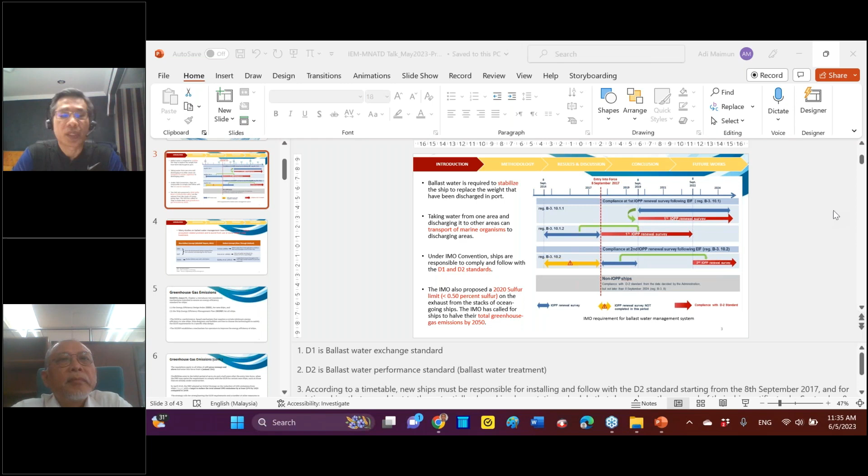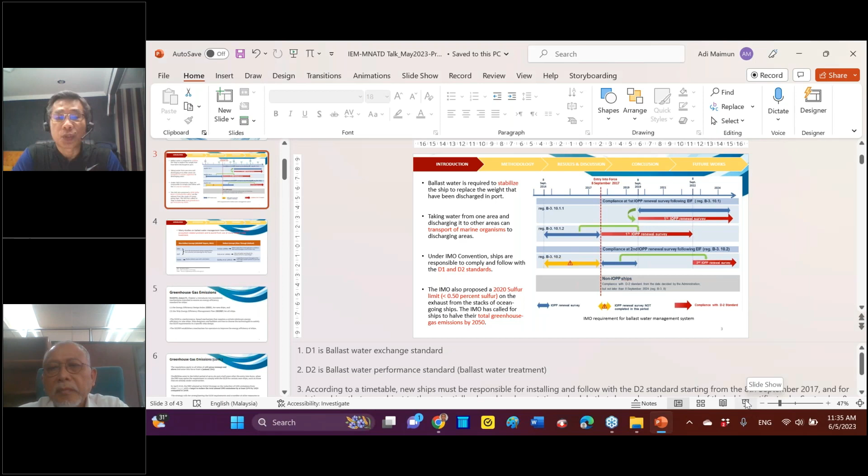Today we have another session of technical talk organized by MNATD, and Alhamdulillah, this morning we managed to bring a special speaker, one of the OTAI in UTM, which is Professor Dr. Adi Maimun. He will be delivering a very specific subject. The title is Reducing Hull Resistance Using Air Injection for LNG Vessel with Free Ballast System.

I think this is a very interesting subject, by the fact that LNG vessel is heavily utilized in the marine industry as well as the oil and gas industry.

A very quick background on our speaker, Professor Adi Maimun. As I mentioned previously, one of the OTAI that we regard, especially within the marine industry. At present, Professor Dr. Adi Maimun is currently serving as a professor in naval architecture in the Faculty of Mechanical Engineering, UTM Skudai.

His specialization is mainly in the field of marine vehicle and structural dynamics using CFD, FEA, AIS, adopting time domain simulation, and he also performs experimental work. He has published, I would say, more than 100 international papers related to his area.

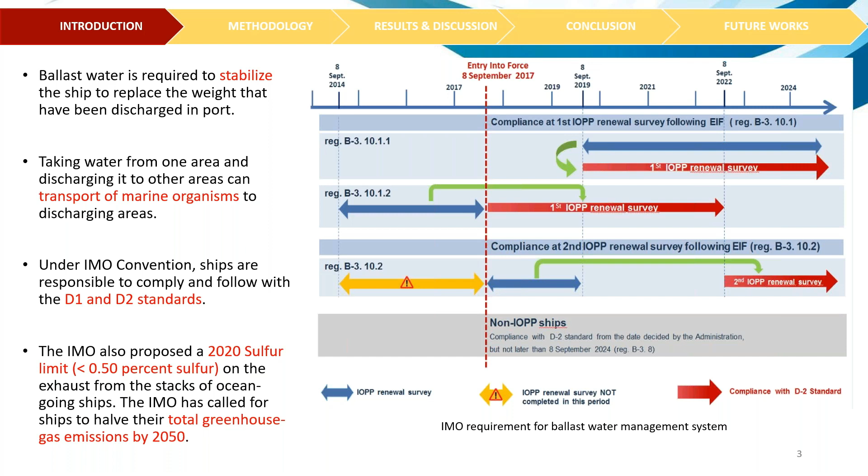So also, the IMO proposed reduction in sulfur and reduction in emission, for reducing this greenhouse effect due to the emission. So by 2050, we have to come up with a big reduction in gas emission, of which Malaysia has ratified this IMO regulation. So we have to comply with this by 2050.

And with this free ballast, we don't carry any water. Actually, the water just passes through the ballast tank. So it acts like you're ballasting it, but we don't retain water inside the ballast tank.

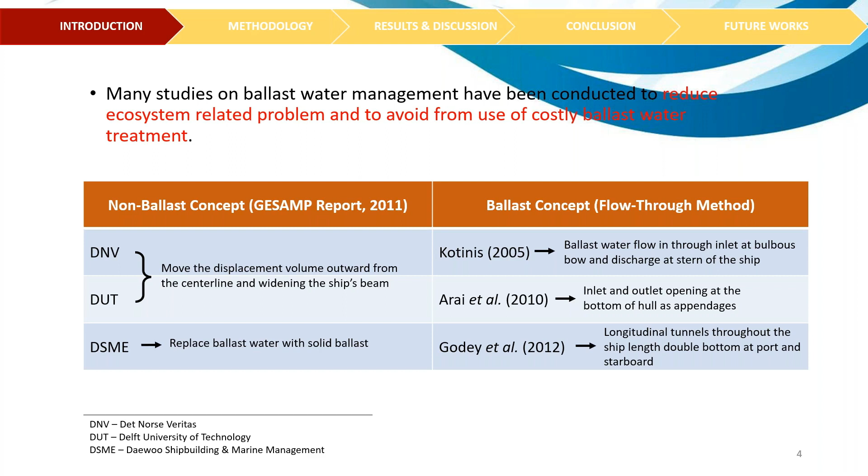So EEDI is basically at the design stage, and SEEMP is more when you're operating the vessel to come up with improved efficiency, so that the target is just to reduce the emission.

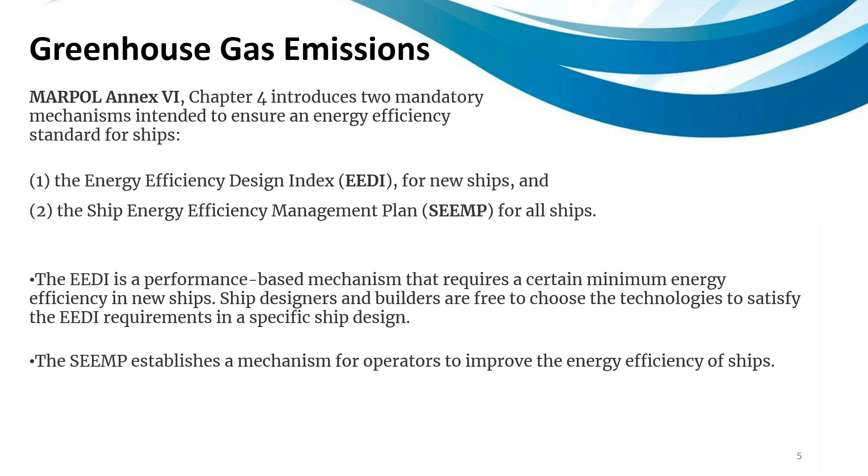The regulation applies to all ships of 400 gross tonnage, so medium and large vessels, starting January 2013. What is required is that the target is to reduce total annual GHG emissions by at least 50% by 2050 compared to 2008. So it's a big job, especially for old vessels, and even new vessels.

You need to use technology, and I don't know whether it's good or bad. Malaysia has ratified this, so Malaysia has to comply with this now.

So it involves measures like reducing methane, CH4, VOC emission, anything to do with low carbon, zero carbon fuel, and so on.

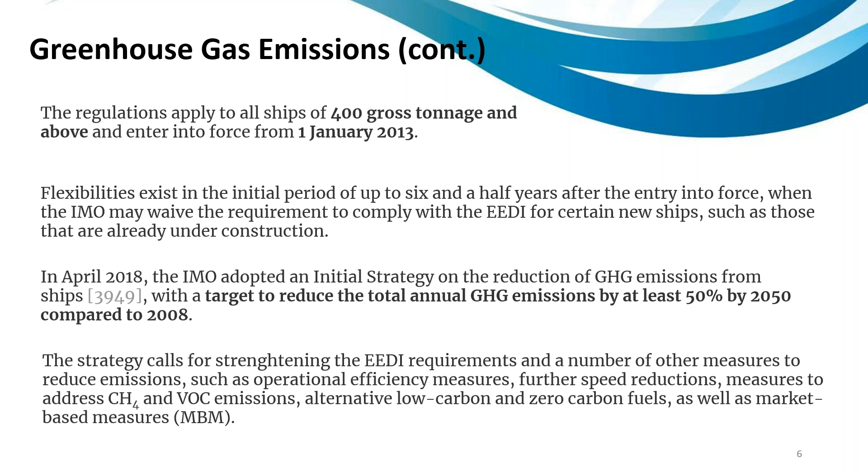So basically, we have this water coming through the hull. We open the inlet from the bow, and the water passes through this ballast tank underneath, and after that, it will go out at the stern.

Okay, there are some other things, some details of different methods they use, but overall, that's the concept—the water just passes through the vessel from inlet to outlet.

So the main thing here, we see the effect on resistance. Based on previous study, Kotinis got a 4.6% increase in resistance, Arai got less than 1%, and Godey got an increment of 35%.

That's quite a lot, so this method may not be positively looked upon by the operators, especially 35% meaning you have to increase the power by 35% to go at the same speed. And also not good for emission, is it?

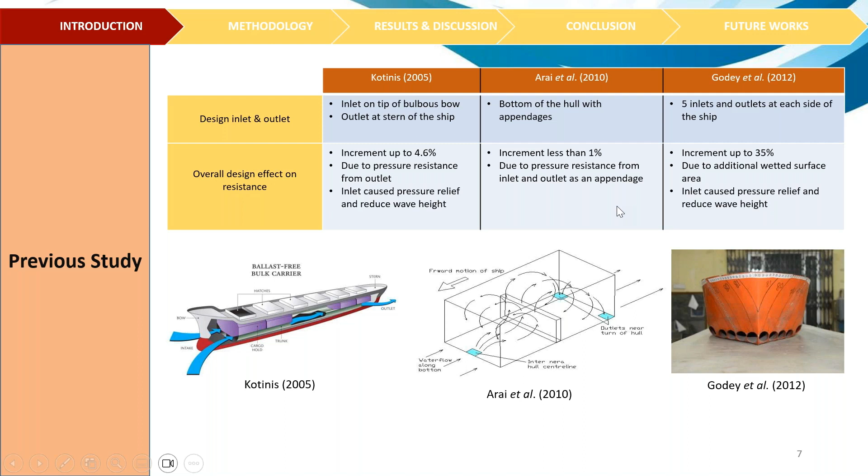With increase in surface area, you increase the friction because when the water slides against any surface, there is resistance introduced. This leads to increased powering, and with that, loss in ship efficiency. As mentioned, these are the people who used this method—Kotinis, Godey, and Arai. So we need now to reduce the resistance somehow.

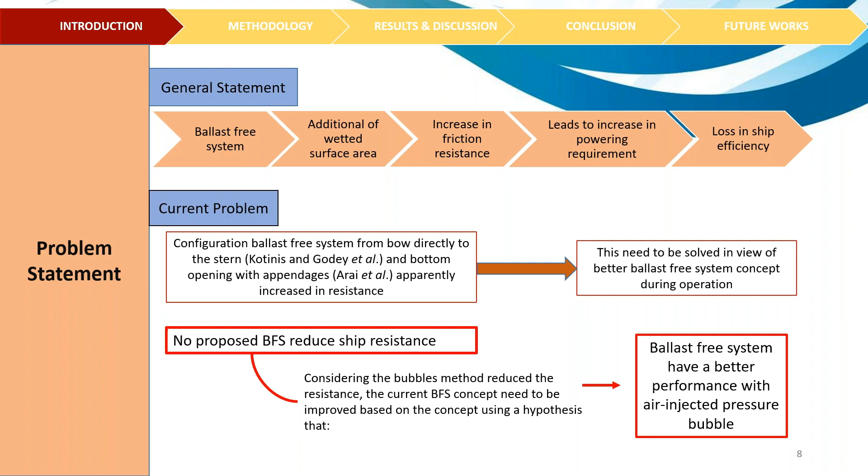So what they basically suggest is that introduction of this air, or air injection under the hull. With that, we can reduce the resistance because of the mixture of air and water. Because air has less density and also lesser viscosity as compared to water, that will give the indication that it will reduce the resistance.

So let's have a look at basically what we are talking here. I don't know whether some of you are familiar - the naval architect is familiar, because resistance powering is very important for the naval architect, because it's in the contract of building the ship. So the owner may reject the vessel, delivery of the vessel, if the powering is not comply. That means in the contract, they specifically say how fast is the vessel, and the powering requirement, especially with the EEDI.

They have to check the fuel consumption, the emission, and so on. That means at the design stage, you must design the vessel in such a way that you can achieve the contract powering requirement. So basically, the resistance is divided into three parts.

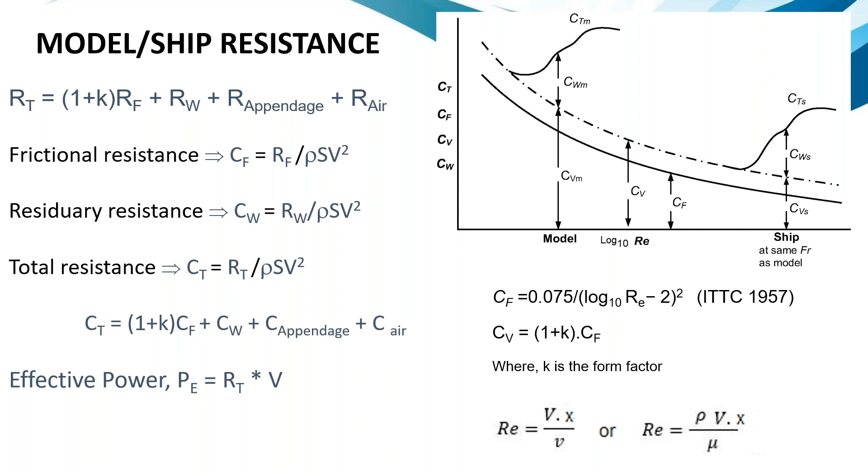We are dealing with predicting or obtaining the resistance, analyzing the resistance of the ship or the model. So another thing we have to look at, this is quite common, especially in mechanical engineering.

In engineering this is called a boundary layer, because it's a real fluid we are talking about. With real fluid, there is this boundary layer. The basis of this boundary layer is that it will generate later on what we call the shear stress, which results in the skin friction. For the model scale, it's usually in laminar boundary condition, and the full scale is usually in turbulent boundary condition at higher Reynolds number. We can predict the thickness of this boundary layer using some formula.

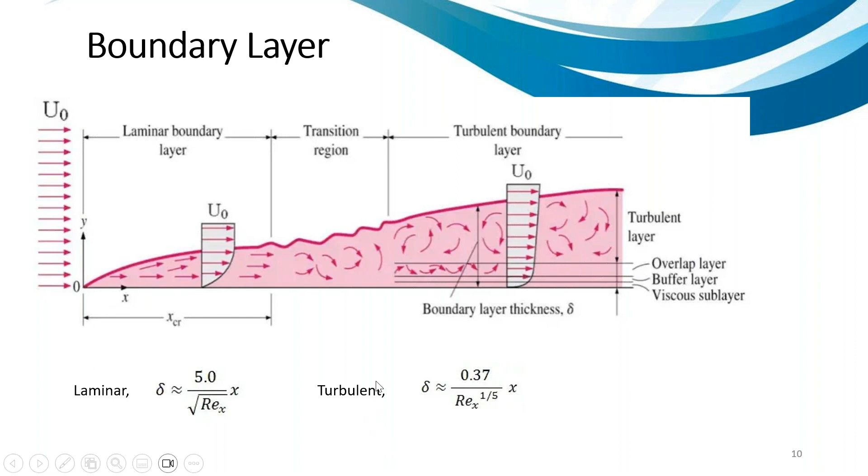So as I mentioned, with this boundary layer you end up with shear stress, because shear stress is a function of this boundary layer, and also of the dynamic viscosity, which is related to kinematic viscosity by the density of the fluid. Depending on the profile of your boundary layer, your shear stress will be affected.

So what you have to do is try to decrease it. To get a lower shear stress, you have to decrease your velocity profile, and also if you can decrease the properties of your fluid, like the dynamic viscosity, then you can reduce the shear stress. Once you reduce the shear stress, you can reduce the skin friction using this second formula. Usually what we do is this is for local.

For the overall length of the body, we measure the fluid drag - for the ship model we use the towing tank - then divide by the wetted surface area.

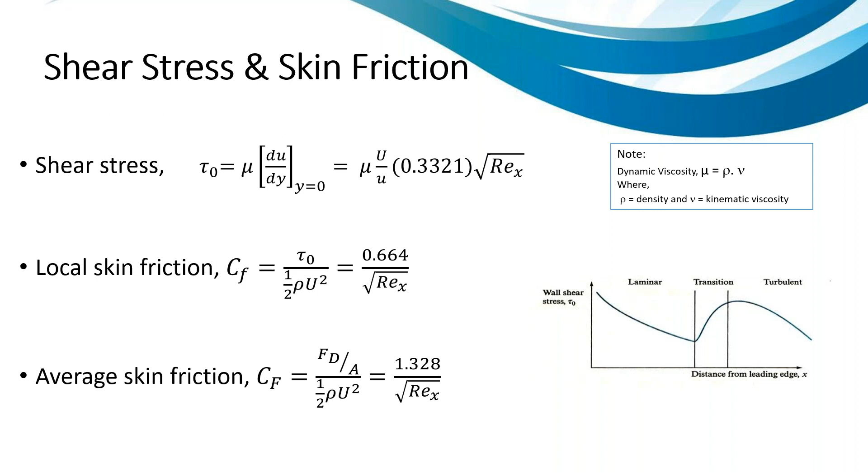So this is the basis of the air lubrication technique. We have here three techniques. First, the MBDR - MB means micro bubbles. You introduce bubbles on the surface of the body so that you can change the properties of the fluid. That means, as I mentioned, you can reduce the shear stress, and with that, reduce the skin friction.

The second method is not using bubbles but using air layers - that means more bubbles introduced so that it becomes a layer instead of bubbles. The third one is putting a cavity, an empty space so that the water doesn't touch the surface. So we inject air for these two methods, second and third - one producing the layer, the other producing a sort of cavity. The top one also injects air, but not so much - it generates bubbles instead of an air layer or cavity.

From the study, they found it's more effective in reducing resistance - the percentage decrease in resistance for the ALDR and ACDR methods is more effective than using micro bubbles.

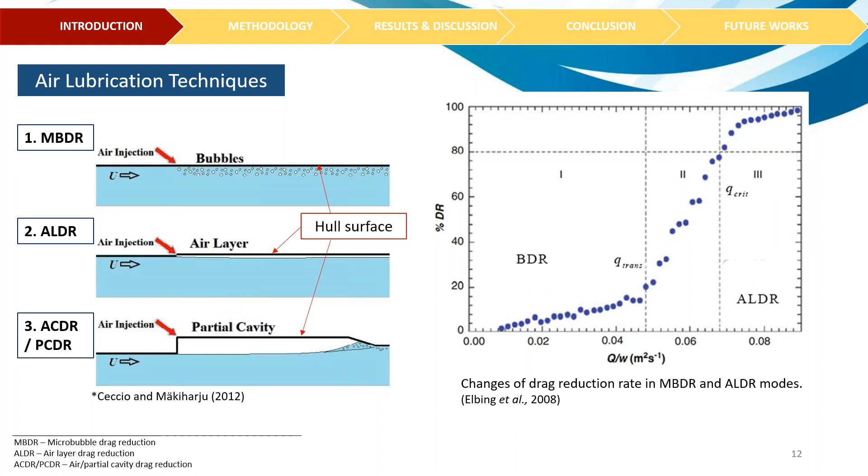Okay, here just showing the picture of this MBDR, ALDR, and ACDR method. What else? Okay, what is the difference?

So the middle one is the ALDR method. I think this will be the most common method if you want to reduce the drag using air injection. However, the disadvantage is the energy to produce it - you need more of these compressors to generate the air layer.

And the third one, the ACDR, as I mentioned, you need to modify the bottom hull, which most company owners wouldn't like to be done, because you lose some space, and you have to make a hole underneath the hull, a big empty compartment. You see? Okay.

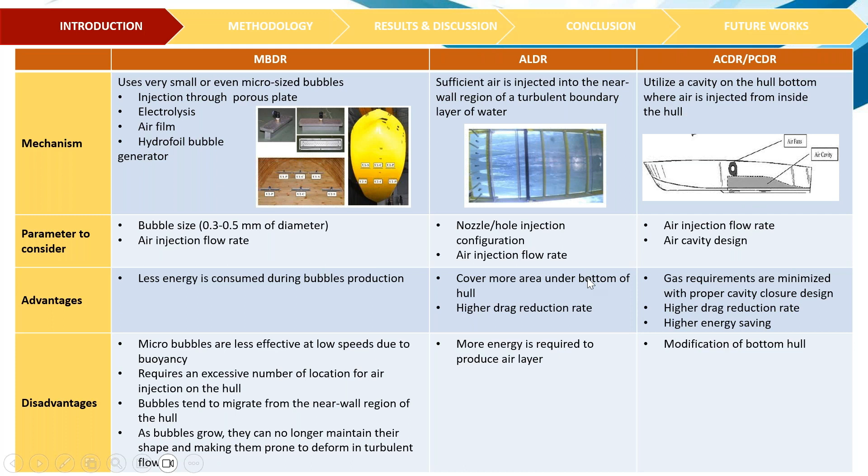And with the air layer, I think the important thing is the thickness of this air layer, so the correct thickness should be obtained. From the previous research, you found out that it's between 4 to 8 millimeters of thickness for the air layer.

So to produce the air layer, you need to produce the flow rate. This is by using compressors to inject air, and that gives you the flow rate of the air. The thickness of the air layer depends on the width of the test model, how wide you want the air to cover underneath the hull, and also the speed of the vessel also affects this thickness of the layer.

Okay, so the faster the vessel, the more flow rate you need to maintain the thickness of the air layer. And then maybe with some rough surface area, maybe you need a larger air flux.

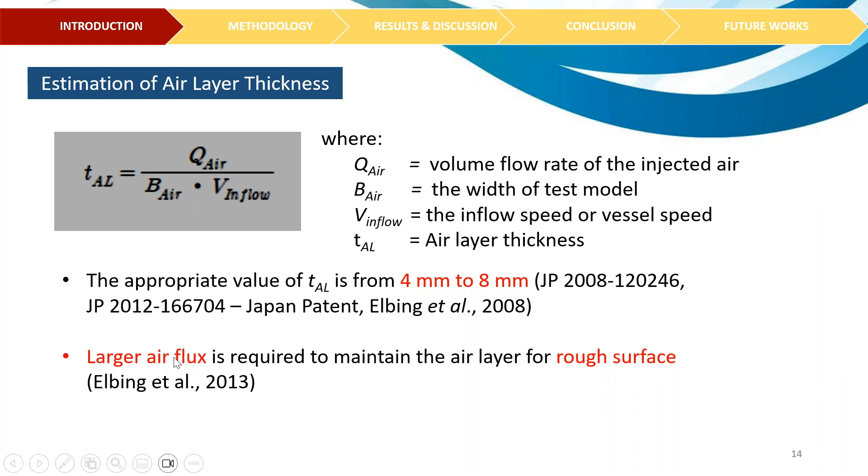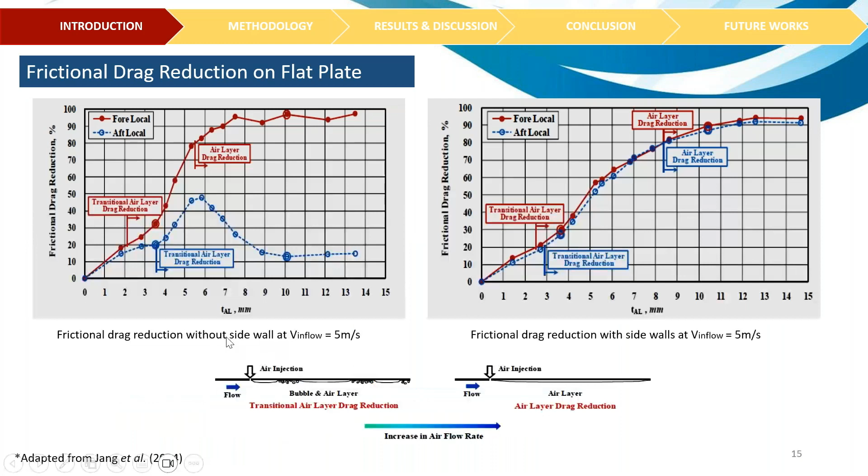But as I'm sure, just now, by putting some sidewall. Yeah? Okay.

So for our case, air injection ballast-free system for LNG vessel, the solution that we propose here is more with the ALDR method, producing the air layer, because it's more effective than the MBDR, the micro bubbles. As I mentioned, ACDR is not that popular with the owner, by making the empty compartment underneath the hull.

Okay, so the objective here for the research is to determine the total hull resistance, fitted with and without air injected for the free ballast system, and then to evaluate the role of the air injection to the ballast system and determine the contributing factors that contribute to the resistance or reduction of the resistance.

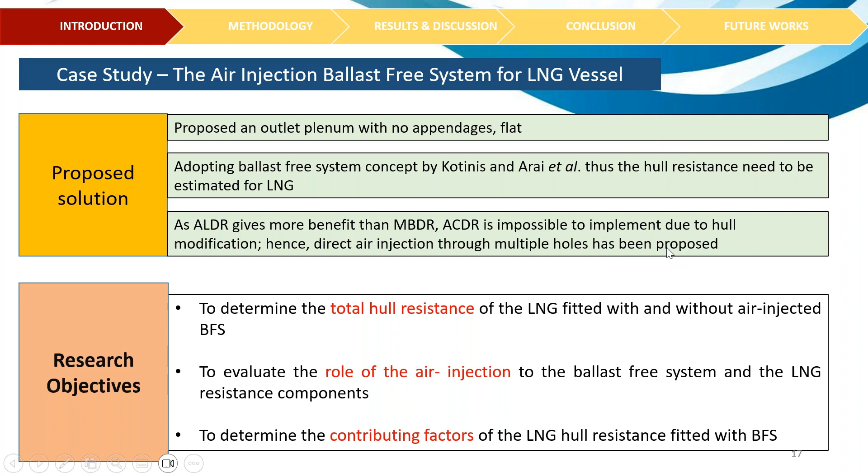So this is the methodology. We follow based on this continuous process. We have the inlet and outlet to consider, and then air injection. So basically, the inlet is at the bulbous bow, and the outlet is at the stern.

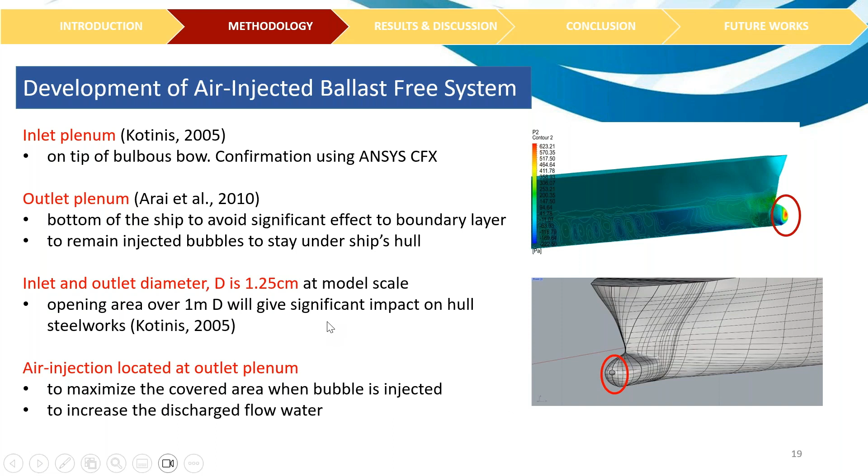So this is the proposed concept that we introduce - air injected ballast-free system. You have the water from the bow going into these pipes, then it goes into the ballast tank. Also, air is injected before the water is released to the outlet. We inject air, so the outlet is a mixture of the air and water.

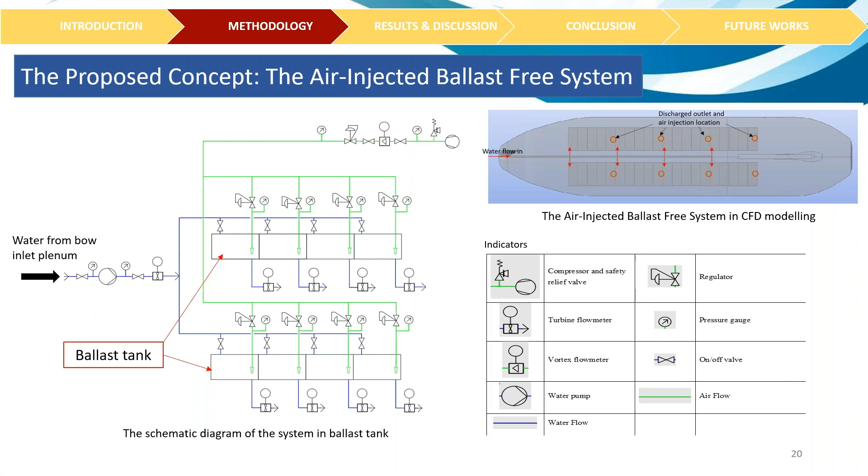This is the CFD method. Before we do the experiment, we have to study the numerical method first to see whether we are getting it right or not.

So we used ANSYS CFX for this. At that time we were still new with CFX, but now we use OpenFOAM, because CFX requires a license and we had problems paying for it, so now we opt for OpenFOAM. That means we need lecturers specialized in this area to run the CFD.

Basically, it's just numerical - to me it's like a virtual tank, running this in a virtual tank before you do it in a physical tank. You have to set your boundary conditions and use a solver like CFX. I don't need to go into detail here.

You put in the water, you have the vessel inside, and all this represents the part of the tank - inlet and outlet water. In the towing tank we tow the model, but since it's easier to flow the water using CFD, it's the same thing - just relative movement between the model and the water. Because for the towing tank it's very expensive to move the water, it's cheaper just to tow the model instead.

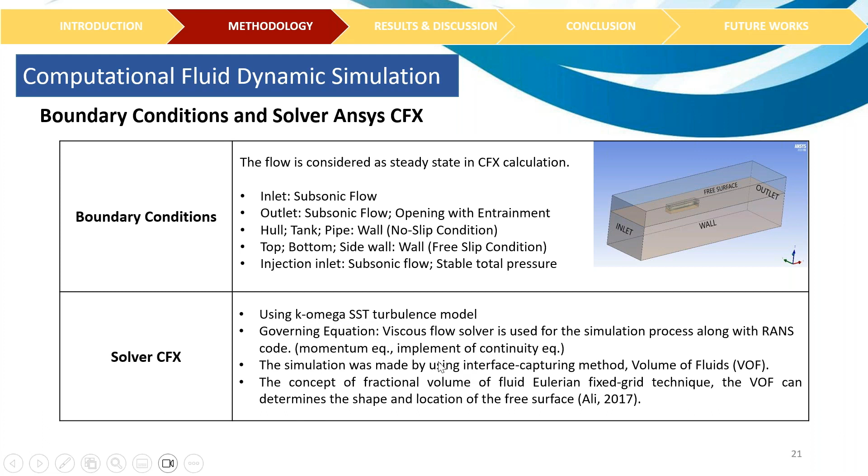This is the grid - they have to introduce a lot of grid points, so the more grids you have, the heavier the computation. We have to use high performance computers for that, and we are planning to buy more high performance computers because in the future more CFD will be required.

Even now our customers or clients prefer us to run and compare both CFD and the physical experiment, because in CFD we can have better visualization than the towing tank.

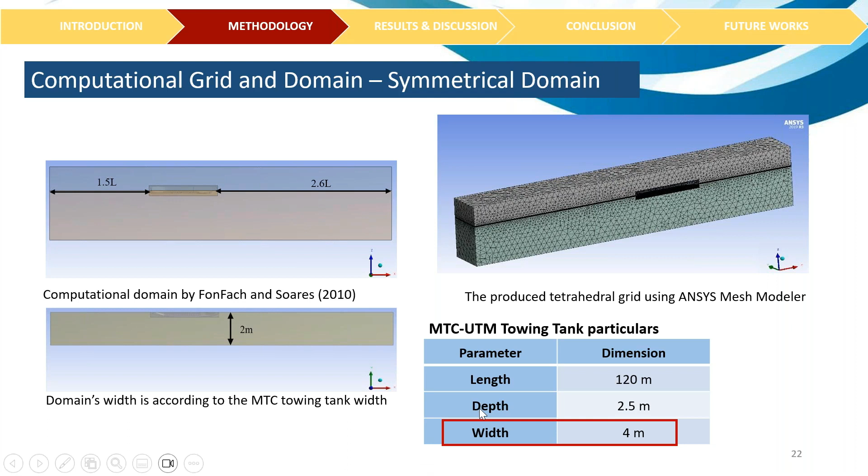So we have a towing tank with a length of 120 meters - quite a big tank. The depth is 2.5 meters and the width is 4 meters. This is the actual physical tank.

And the carriage speed - as I mentioned, you have to tow the model instead of moving the water, because it's more expensive to move the water for a tank of this size.

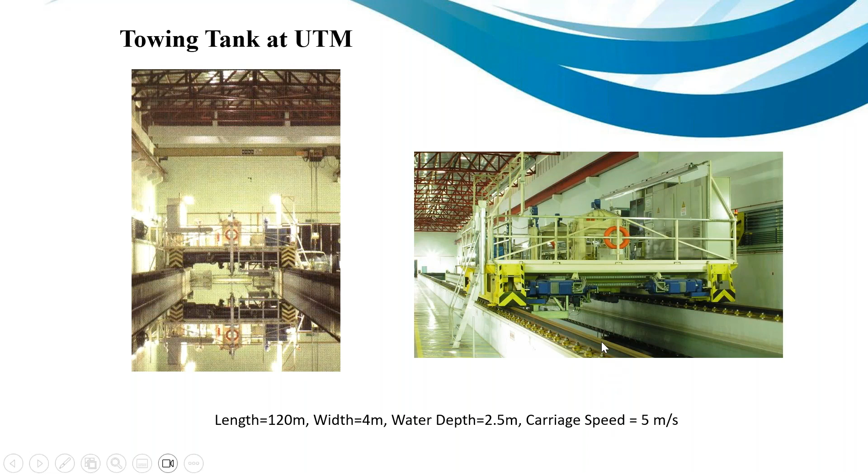Then we make a model - all these are made in-house in the lab, using gelutong wood. This is the model of the LNG vessel, actually the Tenaga class. The Tenaga class is not in operation now, so this is the first vessel made for this.

The length is 280 meters, with a scaling factor of about 80, so in the tank the model is about 3.5 meters long. Breadth is 41.6 meters full scale, 0.52 meters in the model, and the draft is 9.76 meters full scale, or 0.12 meters in the model.

So we have this model, which was done previously from previous research, to determine the resistance of this hull, because previously this hull had problems when maneuvering in the Suez Canal - it was a maneuvering problem. Later on we used the model to study the resistance as well as the effect of free ballast and air injection.

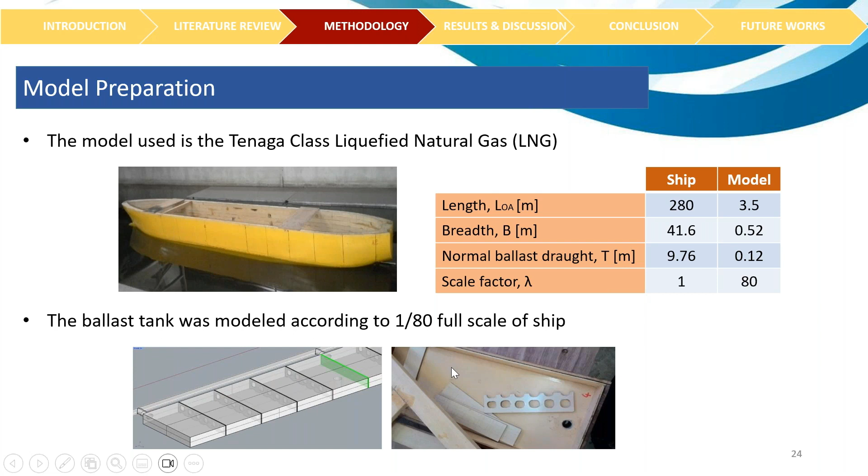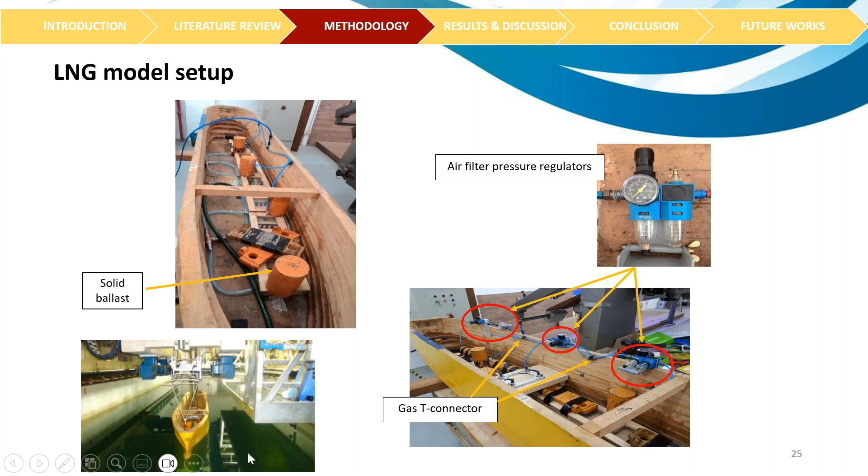Then we test 3 sets - first the bare hull, meaning the original hull. Then we include the free ballast system, where water flows inside the ballast tank and goes in and out. And then we incorporate air injection into the free ballast system to reduce the increase in resistance.

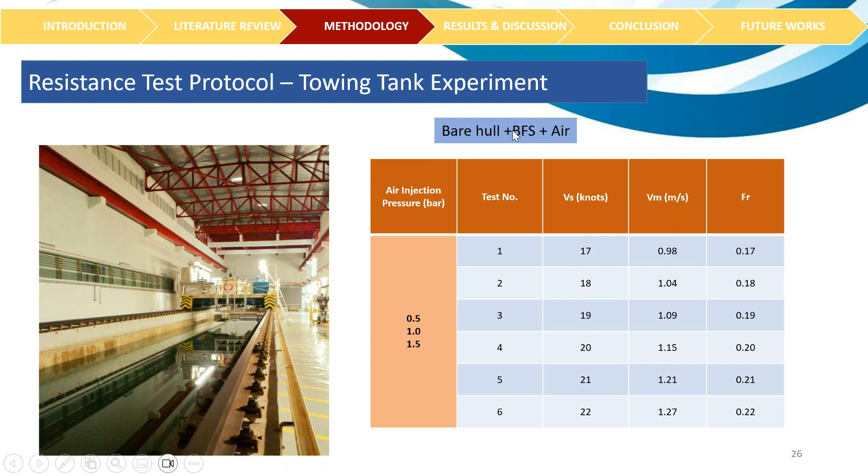So these are the results.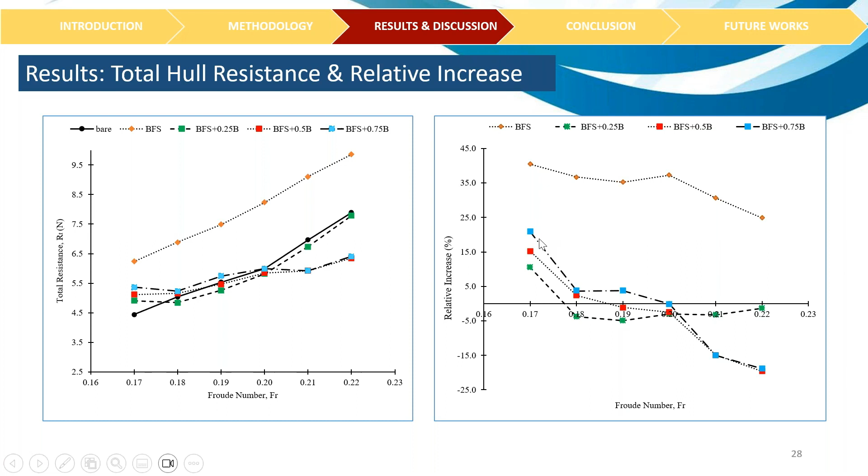And it seems that Tuan gets a better... no, Tuan is less - less with the created bubbles. So it seems here that using the ALDR method is better than MBDR, because Tuan uses the MBDR and Yanuar uses the ALDR. We also use the ALDR, so our result is better than the rest, than the one we compare.

So we are now thinking why we get a better result. I think it's because we have this free ballast system - this water moving as well in the pipe, and then as we introduce the air injection, the water just moves with the air as well, giving a platform for the air to move. So this is what we think, though we haven't done detailed work on this. Hopefully in future we can detail out why our result looks better than the previous ones, because the previous ones, like Yanuar and Tuan, only used it for the bare hull - they were not researching the free ballast system.

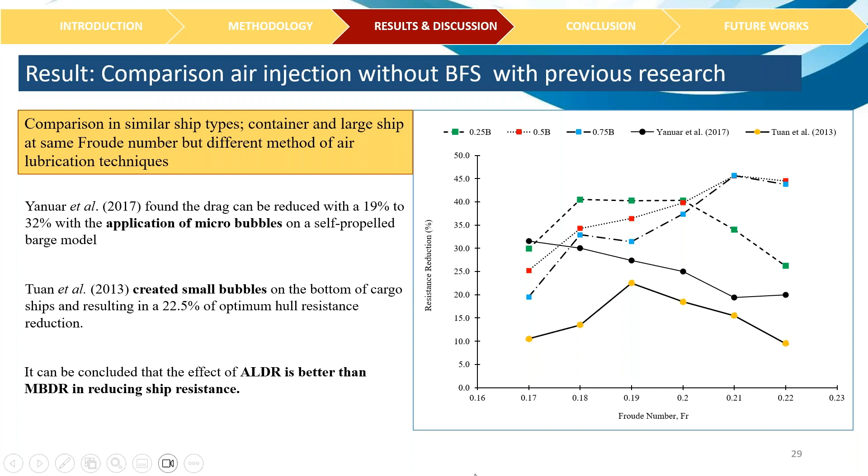We do it because we want to reduce - we already have the free ballast system, and then we introduce the air injection. So that may be a point we can further study, the effect of this moving water as well as air injection.

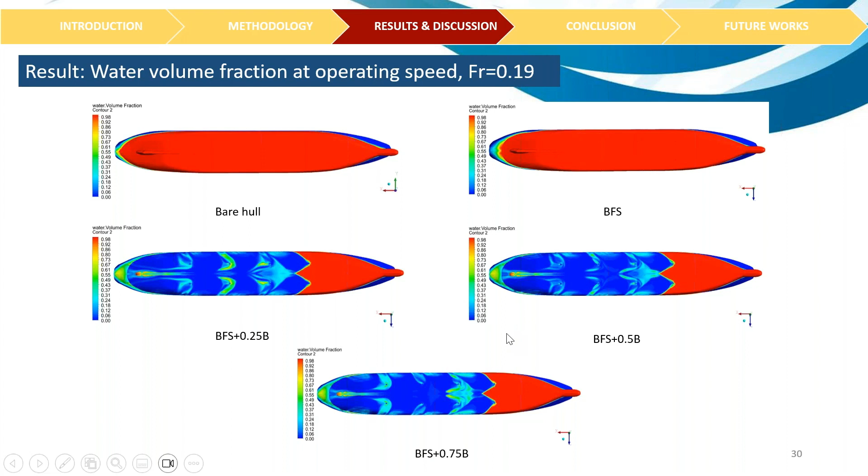With this we can study how much water volume fraction is the optimum to introduce. If you introduce too much air, it wouldn't be that optimal - in fact it may increase the resistance as well. So this is the result showing the effect of this water volume fraction. You can see with the smaller water volume fraction, you tend to have better results - that means less water and more air. But when you have more water, then you have less reduction.

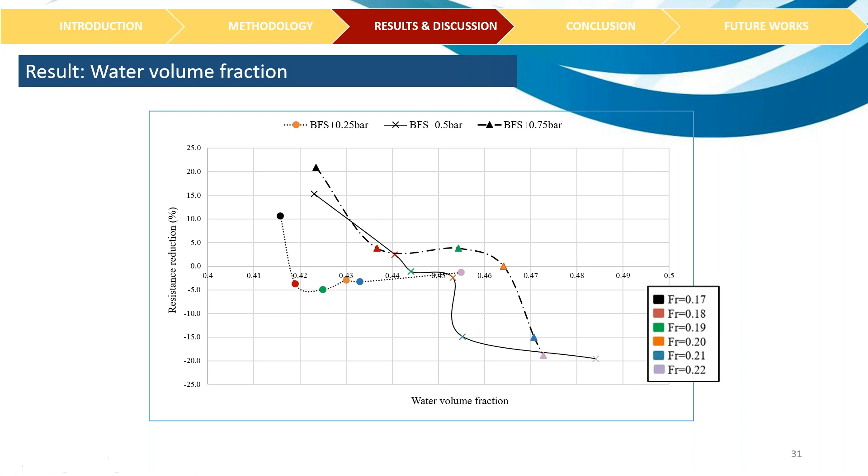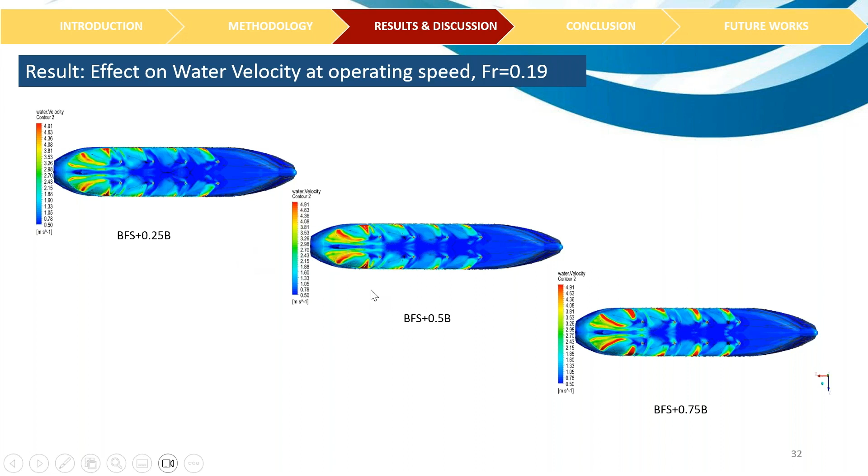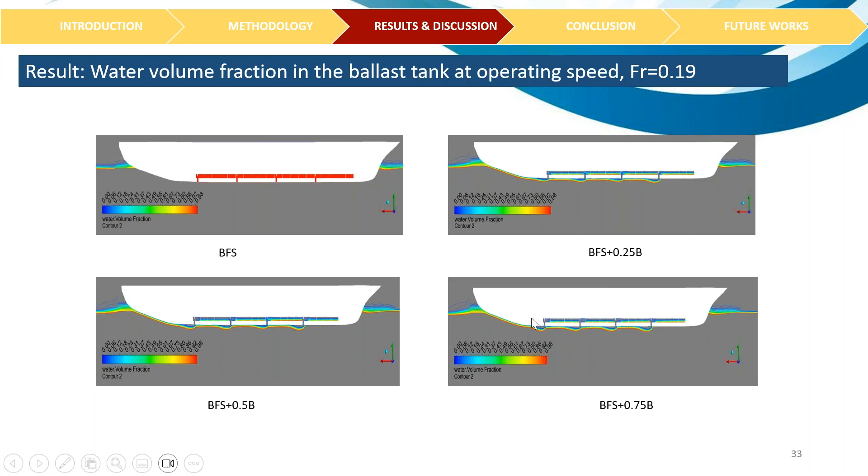This is the water fraction effect on the flow of water in the pipe. With the free ballast system, the water goes freely in. And then when you start to introduce this injection, it tends to give you some blockage effect of the water coming out - it tends to slow down the water. So this is what you need to study.

So this is water volume fraction in the ballast tank at operating Froude number 0.19.

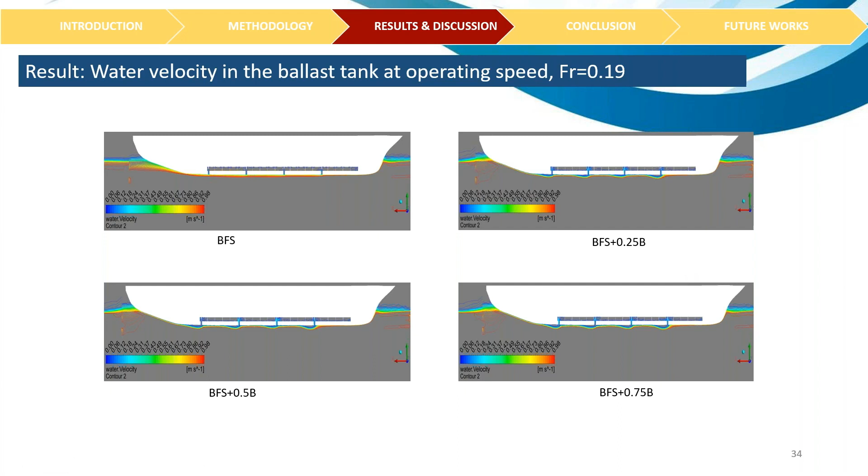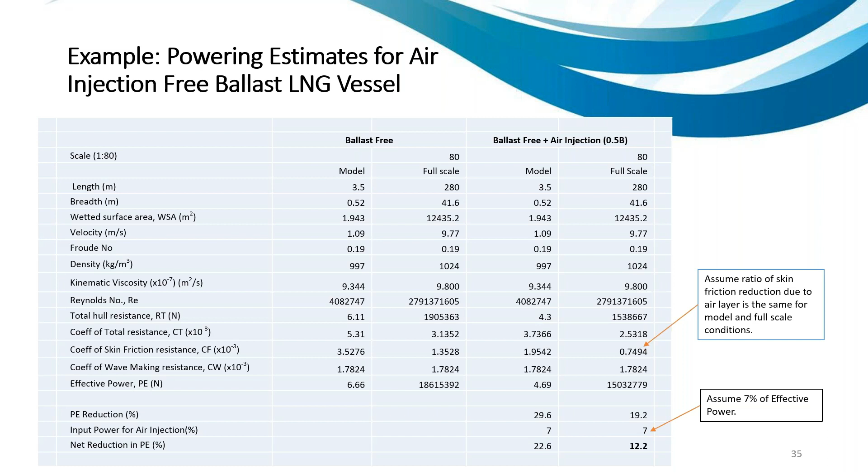So the use of air injection has reduced this free ballast system resistance by 1.7% on average for air injection overall. Overall, when you use the ballast system and then use the air injection, we get almost the same resistance that we had before introducing the free ballast system.

So the most effective injection pressure is at low speed, about 0.25 bar, while at higher speed, 0.5 bar. So that means you have to really find the optimum compressed air for this air injection. If you use it too high, maybe it's only good for higher speed. For the lower speed, you should have a lower pressure.

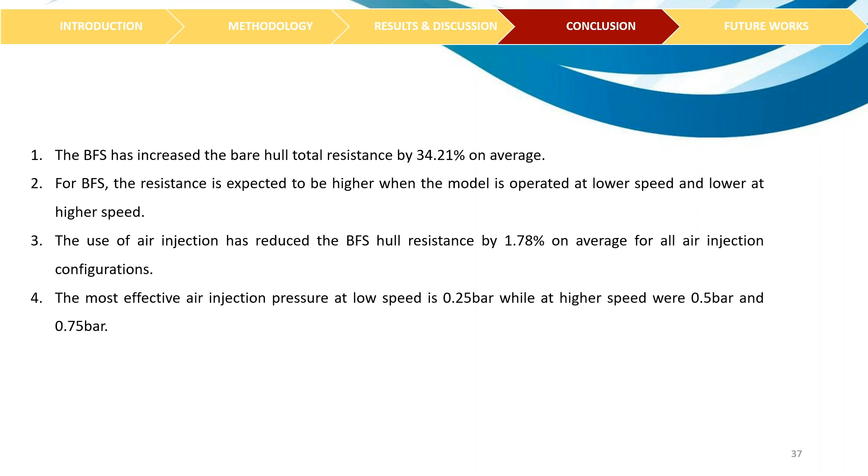So these are the recommendations: use a pump to enhance the flow of water. Because to increase the flow, it seems that the air injection does affect the flow of the water in the pipe. So that's for the free ballast system.

And then relocate suitable air supply so that the ballast system can improve its performance. This is the position of the inlet outlet, especially the outlet. And the water outlet configuration needs to be explored for a better system. I mean the shape of the outlet also needs to be studied.

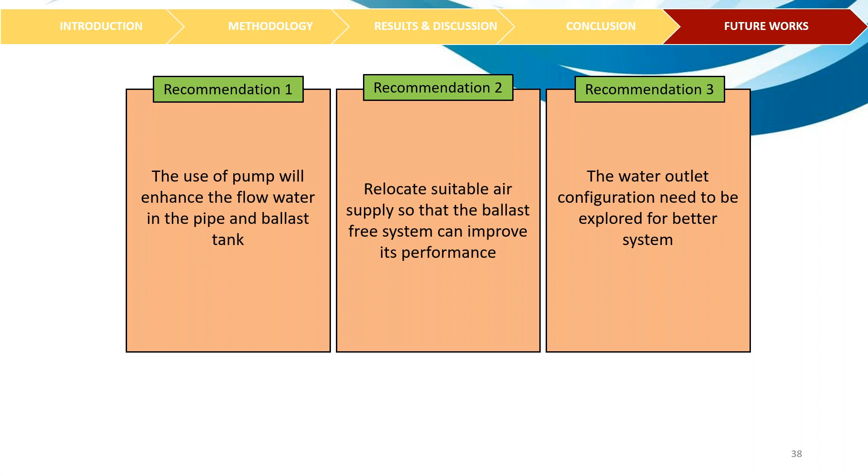So these are just to show you what other researchers have done in terms of air injection. This is from Wu and Ou in 2022. They focus more on the shape, the outlet, here. They have these air holes introduced so that you can get this injected air inside. They have this tank with the water moving - the model may be a smaller model, maybe not a towing tank. They have this air supply, flow meter, air injection device, and a camera to look at the thickness of the layer and so on.

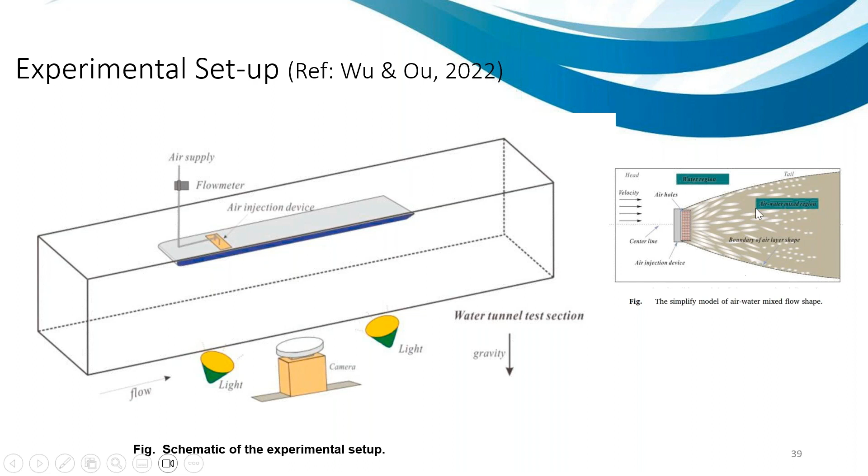This is from Feng, focused more on the outlet shape of the air injection outlet as it goes out there underneath the hull. It seems they claim that using this Nekomimi section - a combination of two pipes to make this shape - is effective in reducing the drag.

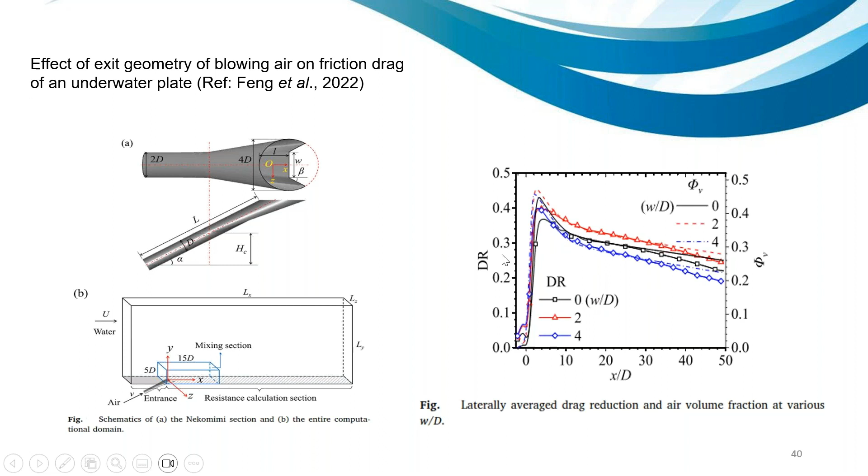This is from Hao et al. 2019, looking more at the shear stress. They put some sensors here, and they also measure the drag of a plate somewhere in the middle of the hull, so that they can get exactly the reduction of the resistance on the flat plate due to the air injection.